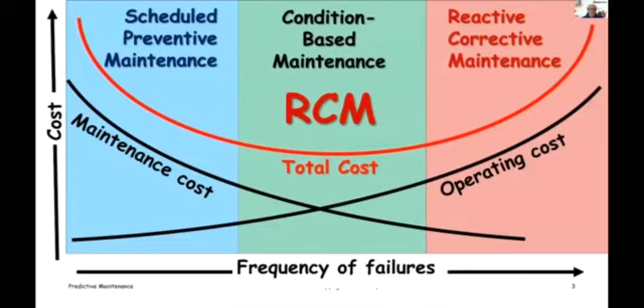So RCM is based on doing things on condition, and its purpose is to optimize cost and provide the optimal combination in terms of how the maintenance program is constructed.

The two primary tenets of reliability-centered maintenance - and it is a very deep subject, there are lots of big textbooks on this subject - but the two main tenets of reliability-centered maintenance that reduce preventive maintenance drastically are the following.

First of all, we want to think about the consequences of failures, and we don't want to be doing preventive maintenance to prevent failures that have acceptable consequences. I mean, for example, if you have two comm radios and one of them fails, that's an acceptable consequence. We have the redundancy to deal with it. It's not going to interfere with anything. We'll just fix the number two comm radio when it's convenient.

So for things with acceptable failures, we avoid doing preventive maintenance, and we accept a philosophy called run to failure. It used to be anathema - we couldn't allow anything in aircraft to fail, but now we're smarter than that. We know that there are a lot of things in aircraft that can be allowed to fail without compromising safety or the mission.

The second big principle in RCM is to do preventive maintenance strictly on condition wherever practicable, rather than on a fixed timetable. And the more we can do it on condition, the more optimized it should be.

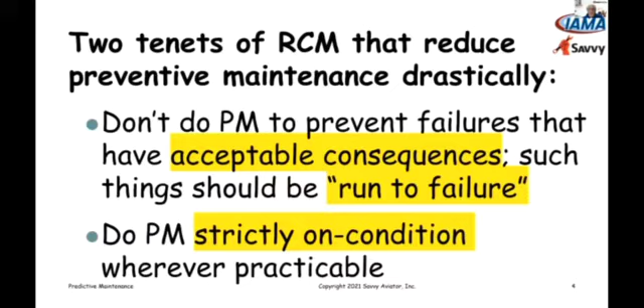We only want to do maintenance when there's a good reason to do it, not just because some number came up on the tach or the Hobbs meter. So condition-based maintenance requires determining condition. And how do we do that?

Well, there are a lot of ways to do that. Sometimes we do it through disassembly inspection, like magnetos, by direct visual inspection. And we have more powerful tools to do that now because we do a lot of work with bore scopes, where we can do direct visual inspection of things that we didn't used to be able to visualize that way.

We have lots of methods for determining condition based on indirect evidence, things like compression checks, oil analysis, oil filter inspection, that sort of thing. And increasingly now, we're able to determine condition based on sensor data. Condition determination based on sensor data is this new field called predictive analytics that I'm going to be talking about. So that's really what I'm going to be emphasizing in my talk to you today.

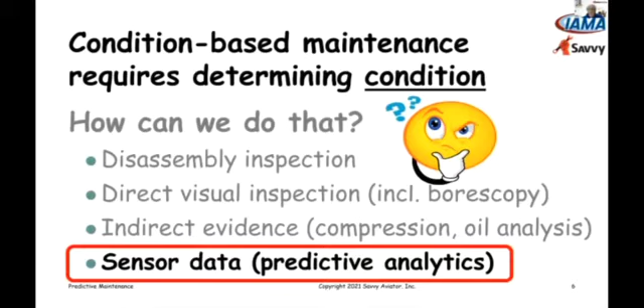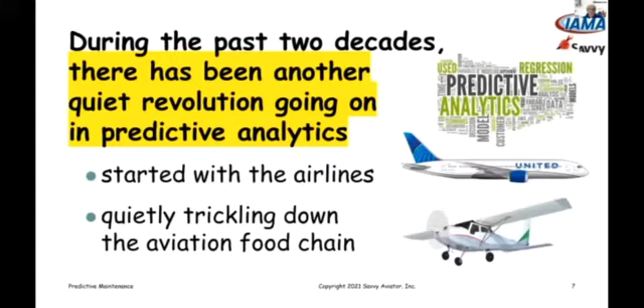Reliability-centered maintenance was sort of a quiet revolution in aviation maintenance philosophy that started in the late 60s and early 70s. During the past two decades, there's been another quiet revolution going on in this field of predictive analytics. And it's been pioneered by the airlines. It's quietly trickling down the aviation food chain to piston general aviation, although we're quite far behind the airlines in this area. But eventually it's going to have a profound effect on how general aviation maintenance is done, I believe.

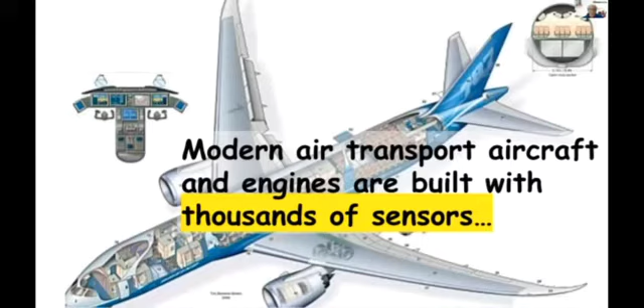If you look at a modern air transport aircraft like a 787 or something, those aircraft and their engines are built with thousands of sensors. Pretty much everything that can be measured in these airplanes have sensors that measure just every conceivable parameter that you can think of. Engine, electrical, hydraulic, air data, vibration sensors, flight control positions, landing gear positions, fluid levels, and all of the different things that have fluid in them, that sort of thing.

And all the data from these sensors is digitized by a data acquisition unit. And then it's either downlinked to the ground in real time while the airplane is flying, or it's captured in something called a quick access recorder and extracted from the airplane as soon as it lands.

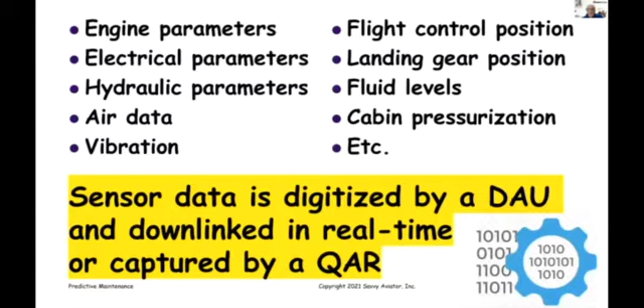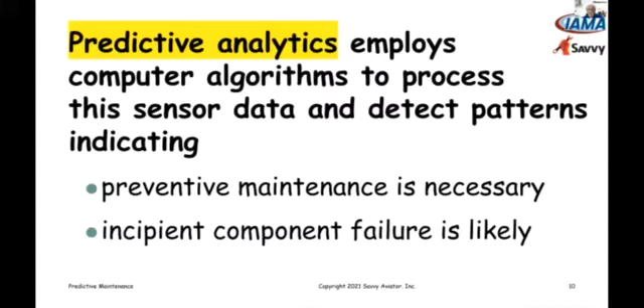And so predictive analytics employs computer algorithms to process all of this sensor data and try to detect patterns that indicate either that preventive maintenance is necessary or that some component is reaching the point where it's likely to fail incipiently. And so the whole purpose of all of this computer analysis of sensor data is to, again, try to do a better job of deciding when maintenance is necessary.

When we do it on a scheduled basis, we're typically doing it way too early. Scheduled maintenance is ultra conservative, and it winds up doing more maintenance than is necessary. Condition-based maintenance was a significant improvement, but predictive maintenance tries to go a step further and provide a more efficient way of determining when maintenance should be done.

We don't want things to deteriorate to the point that they fail, and that we have to do corrective maintenance, unless it's something that is okay to fail, so something that has acceptable consequences. But we don't want to do it too early either. So the whole idea of predictive maintenance is to try to catch it just in time.

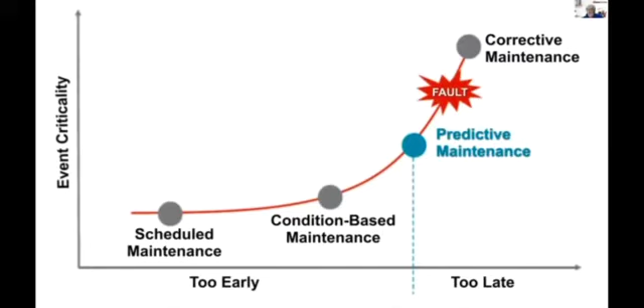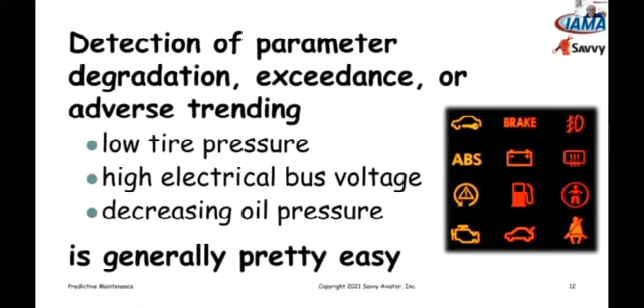Now, there are different things that we look at when we look at this sensor data. A fair amount of it are things that are just parameters where we're looking for degradation or exceedance of some limit or some trend that we don't like. Things like low tire pressure, high electrical bus voltage, decreasing oil pressure. And those are very, very easy to detect. Computers, it's a very simple exercise to analyze the data and look for things like that.

The more interesting things that we try to do with this data is prediction of rare events, things that don't happen very often. Contaminated fuel nozzle, a damaged compressor blade, a failing engine bearing. And prediction of rare events tends to be pretty difficult and require complex algorithms. I'll talk to you about a little work that we're doing in this area for piston GA engines in a little bit. But at any rate, those are the hard things to do, but they're the things with the biggest payoff.

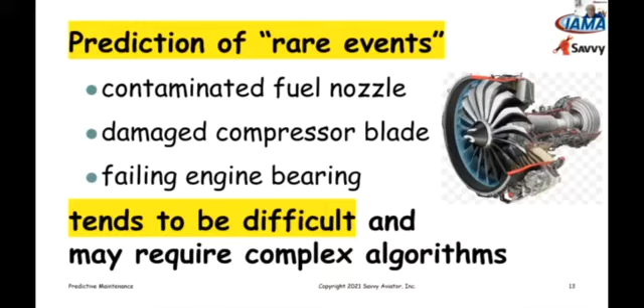Now, this whole field of predictive analytics was really pioneered by Boeing in 2004, when it launched a program called Airplane Health Management, AHM. The AHM monitors the health of an airplane in flight and relays that information real time to airline personnel on the ground. It actually relays it to a war room that Boeing maintains.

I had the opportunity to spend a half day visiting it and seeing all what's going on. It's very, very impressive. And then that information is distributed to the various airlines.

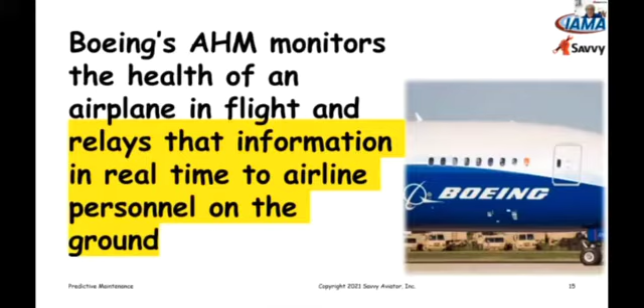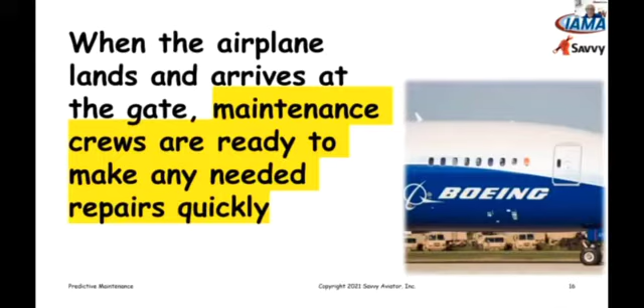So when an airplane lands and arrives at the gate, maintenance personnel already have been made aware of anything that they need to do. If the right hand nose tire is under pressure, or there's some low fluid level or something like that, they know it before the airplane even lands, and they're all ready to jump on it to minimize downtime and get the airplane turned around.

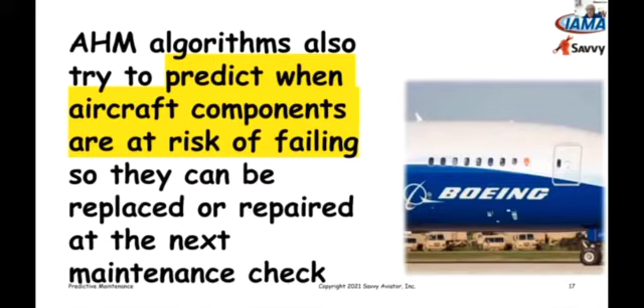So these algorithms, besides just looking for the simple things, also try to predict aircraft component failures, so that the components can be replaced or repaired at the next scheduled maintenance check. And nowadays, every airline that flies the more advanced Boeings, 777s, 787s, imagine the 737 MAX as well, uses this program.

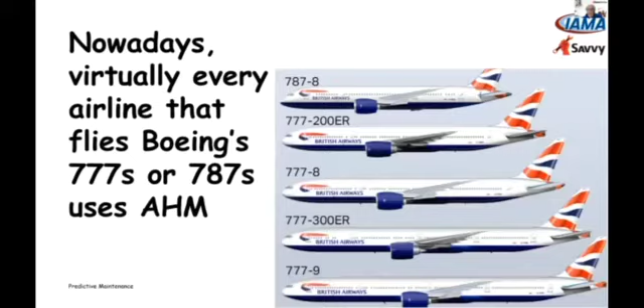Now, Boeing was the pioneer in this area, but they're certainly not alone. There are a lot of major players doing work in the predictive analytics area. Airbus entered into a partnership a couple of years ago with Delta Airlines as the pilot customer for its version of AHM, which they call Skywise Predictive Maintenance.

They were doing this on Delta's fleet of A320s and A330s. In the first few years of this program, Delta has claimed an absolutely remarkable success rate predicting failures before they happen. The statistic I found really remarkable: in 2010, before they started this, they had logged more than 5,600 maintenance-related flight cancellations due to squawks on the airplane that prevented it from being dispatched. In 2018, after being on the Skywise program, they logged only 55 maintenance-related flight cancellations. So it was a two order of magnitude improvement.

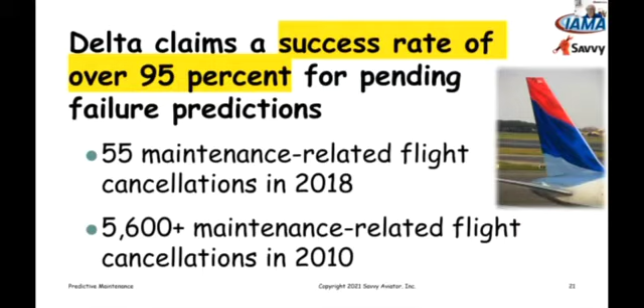That's probably a small enough sample that you can't read too much into it, but it is awfully impressive, and the potential for predictive analytics, I think, is really huge. So much for the airlines. What about Piston General Aviation?

Well, we've been doing quite a bit of work on this. As I said, we're way behind the airlines. This is a very fledgling area when it comes to Piston General Aviation. But Savvy Aviation was founded in 2008, and in 2013 we launched this program called Savvy Analysis, a program to provide analysis of digital engine monitor data.

Nowadays, something a little north of half the Piston GA fleet is equipped with some sort of recording digital engine monitor. Some of them are old and pretty crude; some are new and extremely fancy, with a large number of sensor inputs. It varies all over the place, but over half the fleet currently has some sort of recording monitor that captures data that can be downloaded from the aircraft and analyzed.

We created this program using a freemium model. We put up a very fancy software platform for analyzing the data and made it available to the user community for free. We have about 10,000 aircraft using this platform. We also offer a paid service called Savvy Analysis Pro, where users upload data and ask our team of professional analysts to analyze it for them. We also have a program called Pro Packs targeted to mechanics and shops, as opposed to aircraft owners.

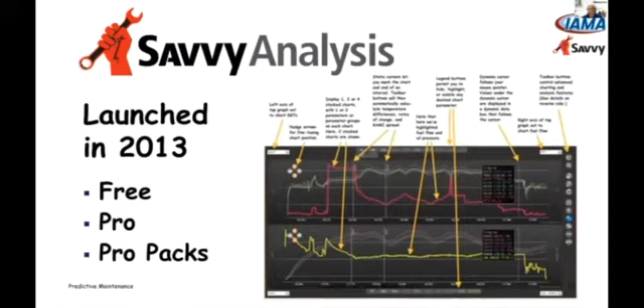This platform we created is web-based, so it can be used on literally any device with a standard web browser. We don't care if you have a PC, a Mac, or an iPad—it all works. We built the system to be omnilingual: it supports literally every make and model of digital engine monitor, both certificated and experimental ones.

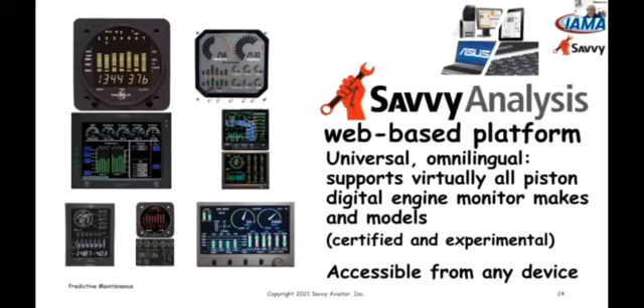Some of the most sophisticated monitors are the ones in experimental aircraft. Dynon has some phenomenal capabilities that you see in a lot of experimental aircraft. But pretty much any aircraft with any model of digital engine monitor that records data and can dump it, we can handle on our platform.

It has turned out to be an amazingly powerful tool for diagnosing all sorts of problems with piston aircraft—mechanical problems, operational problems. We see a lot of stupid pilot tricks that we can identify in the data and tell a pilot, hey, you really shouldn't be doing that, you should be doing it this way instead. We also see instrumentation problems, things like failing sensors and so on.

We always have to be able to distinguish between real problems and instrumentation problems. To some extent, we also do forensic analysis—we work with the NTSB doing analysis of data extracted from aircraft that have been involved in accidents. One of the neatest things about using engine monitor data for diagnostic purposes is that it's completely non-invasive. You don't have to take anything apart to inspect it—you just dump the digital data and look at it, and it's amazing the things we're able to determine just from the engine monitor data.

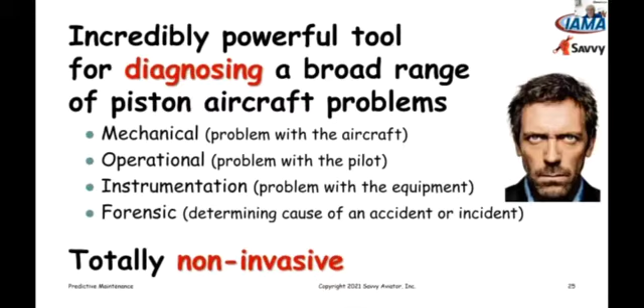The engine monitor data is probably the best thing I know of for assessing the condition of ignition systems. We can determine all sorts of problems that would be very hard to determine otherwise. Here's an example.

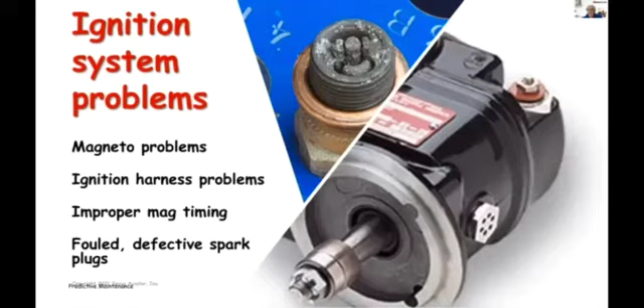This is one of the things we always ask our clients to do. We have a flight test profile that we ask them to fly, and one part of it is to do an in-flight mag check, done very slowly so we get quite a few data points captured by the digital engine monitor.

So here's a mag check that was done in flight. We like to have it done at cruise power with the leanest possible mixture, preferably lean of peak, because the leaner the mixture and the higher the power, the more difficult it is for the spark plug to ignite the fuel-air mixture.

So to test the condition of the ignition system, we really want to put it under maximum stress, worst case conditions. A higher power, very lean mixture is the most demanding situation for an ignition system. If it looks good under those conditions, it's going to be in really good shape.

Whereas the mag check we do during run-up on the ground at pre-flight will only detect the grossest ignition system malfunctions. But if we do an in-flight mag check at relatively high power and very lean mixture, that's a really, really good test.

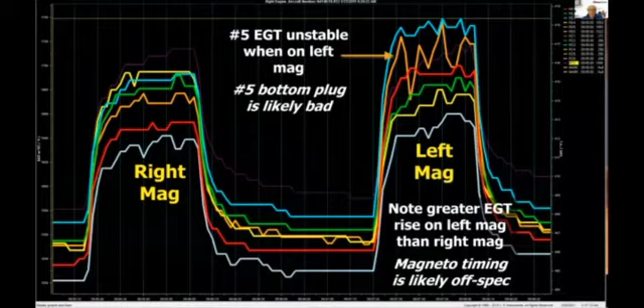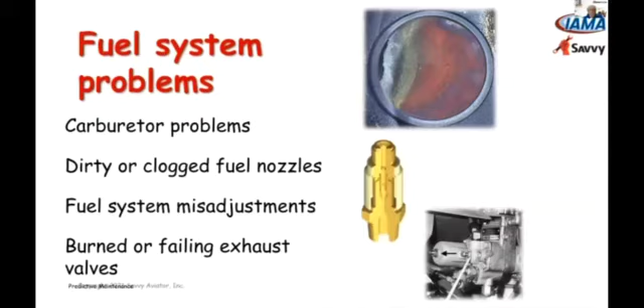The other area that this is extremely useful for is dealing with all sorts of fuel system problems.

The other part of the flight test profile we ask owners to fly is what's called a GAMI lean test, where they do multiple very slow sweeps of the mixture control from a rich mixture to an extremely lean mixture and back again. And we can watch what the EGTs do as the fuel flow varies.

The key thing we do is compute what's called a GAMI spread, which is the fuel flow difference between when the leanest cylinder peaks and when the richest cylinder peaks. In a perfect world, they would all peak at the same time. In the real world, they never do. But that GAMI spread is a good measure of how poor or good the mixture distribution is.

So the first thing we'll suggest is pulling the number 3 injector nozzle and cleaning it. And if that doesn't resolve the problem, then probably a one-size-larger injector ought to be installed to try to get the mixture distribution to be the same.

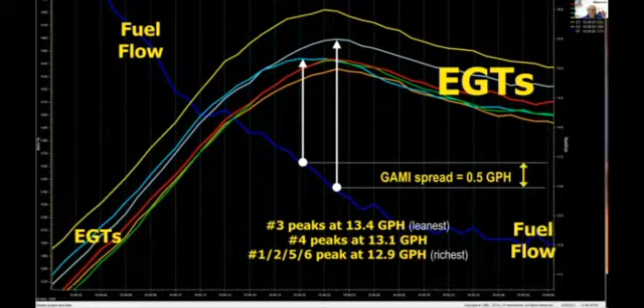Abnormal combustion events.

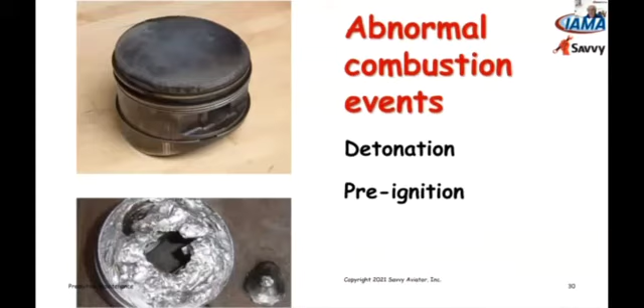This is something more in the forensic area, but we have captured lots of data when very interesting things happen in the combustion chamber. This is an example of a pre-ignition event, a very classic pre-ignition event.

The pilot applies takeoff power. CHTs and EGTs start coming up normally. Then all of a sudden, cylinder number 3 has a thermal runaway. In a period of less than 2 minutes, the CHT on the number 3 cylinder increases from 374 Fahrenheit to 653 Fahrenheit, less than 2 minutes. That's a rate of 2.6 degrees per second, which is extremely rapid. Our platform gives us the ability to just tag 2 points, and it'll automatically calculate the rise rate.

Any increase in cylinder head temperature over about 1 degree per second is normally associated with a pre-ignition event. It's the only thing violent enough to heat up that big head casting that quickly. But we also see lots of detonation events which play out more slowly, but also result in a rise of cylinder head temperature way above what it ought to be. So we've gotten pretty good at recognizing this kind of stuff.

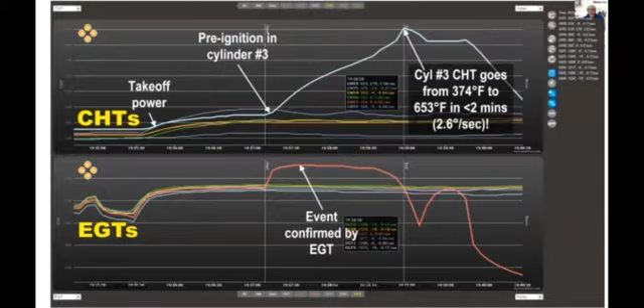Most of these engine monitors let us see at least bus voltage, sometimes various currents, and we can do a pretty good job of analyzing whether the charging system is working properly. We do a lot of Cirruses. They have a dual electrical system that's fairly complicated, dual bus, dual alternator, and dual battery. We're able to see a lot of stuff in the electrical system on that airplane and pretty much diagnose what's wrong.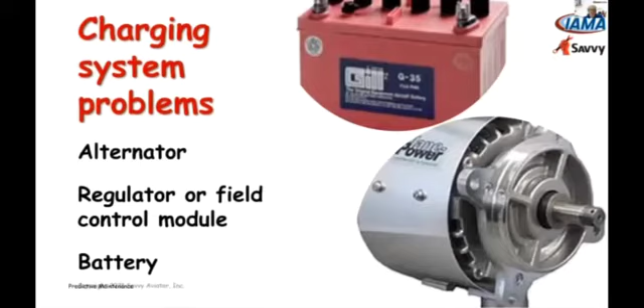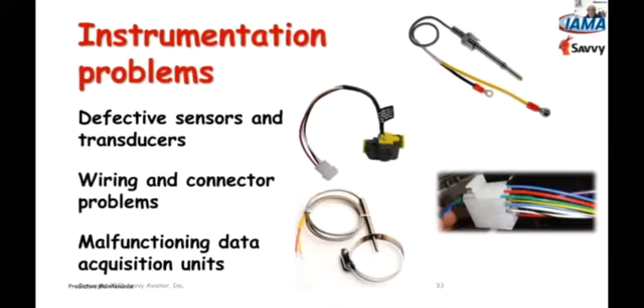Again, sometimes we have to deal with instrumentation problems, defective probes, bad connectors, that sort of thing, and we need to be able to distinguish between something caused by a bad probe and something that's a real problem. It's usually not too hard to do that.

We see a lot of operational issues with pilots using poor power plant management techniques and not keeping their temperatures well controlled and so on. We can see all that in the engine monitor data and give them some tips about what they ought to be doing.

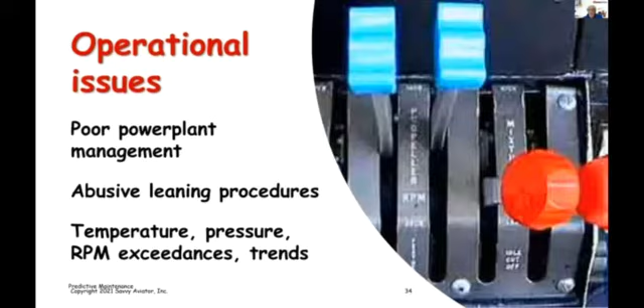Since we first started doing this in 2013, we've now accumulated in our database more than 3,500,000 flights flown by piston GA aircraft. And that's a lot of data. There's some interesting things you can do when you have a lot of data like that, and so we've been working on that.

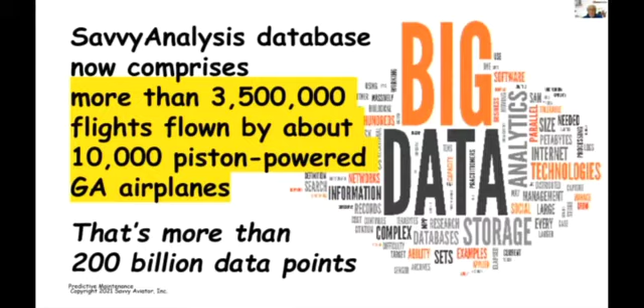In 2015, we launched a program called the report card program. The concept of the report card program was to give the aircraft owner a report on how various critical sensor parameters for their aircraft compare with all of the other aircraft of the same type that we monitor in our system. We have pretty much every kind of airplane flying in that system, but we have a lot of Cirruses, a lot of Van's RVs, lots of twin Cessnas, Cessna 210s, and Bonanzas. So the idea is if you're flying a Bonanza, the report card will let you see how you're doing compared to all the other Bonanzas that we follow.

And that group of aircraft that we compare you against is what's called a cohort. If you think about oil analysis reports, some of the labs, like the Blackstone lab that we tend to use, provide in your oil reports not just the data from your particular engine, but also a mean of the data for all of the other engines of the same type that they follow. So you have something to compare your data with, and that's the concept here with a report card.

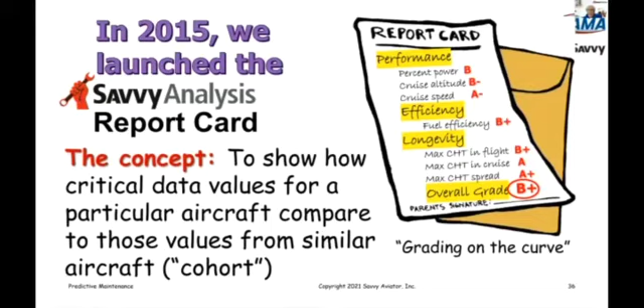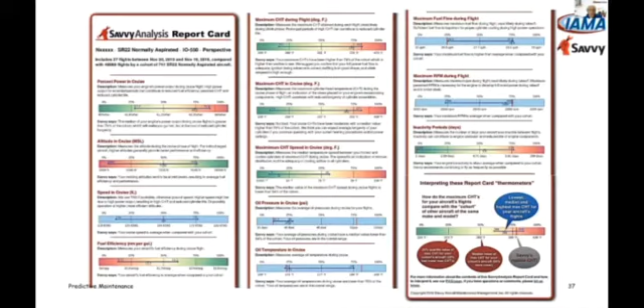So, for example, here's kind of what a report card looks like, and I'll take just a quick look at some of the stuff on here. This particular report card was for a Cirrus SR-22, and it was comparing the result of 27 flights by this particular aircraft against 46,886 flights of 741 other Cirrus SR-22s that we follow.

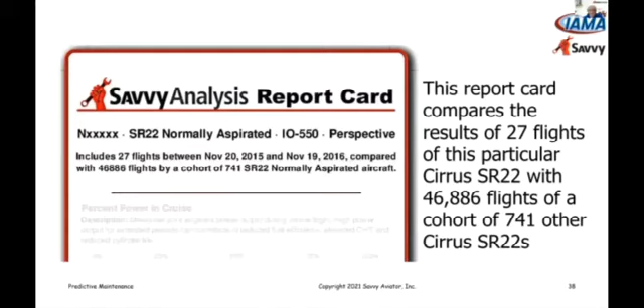So for each parameter, there's a block on the report card that looks like this, that has a thermometer on it, and then some verbiage. The color bar on the thermometer depicts the percentiles of that parameter that we've seen in the cohort, and the blue line that runs down the middle of the thermometer is the actual values for the subject aircraft that we're reporting on, where there's a dot that represents the median, and the two extremes of that line are the minimum and maximum values we saw for that parameter.

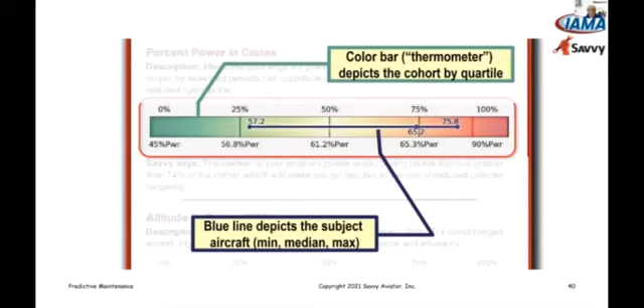And so each block contains one of these thermometers, and then some textual information where we interpret what it means and any corrective action that we think ought to be taken.

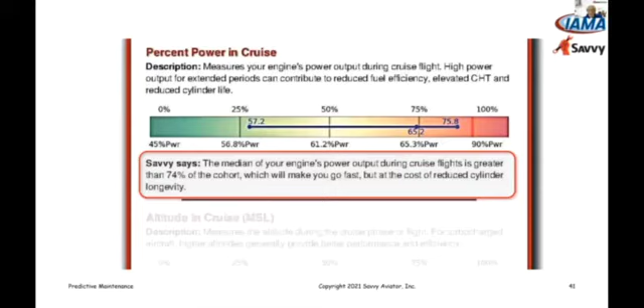All these reports, the report card and trend analysis and so on, we send out periodically to our clients, but they can also go online anytime and ask for them on demand. So if they're looking for a particular date range, they just go on a website and pull the report card or trend analysis report right on the spot.

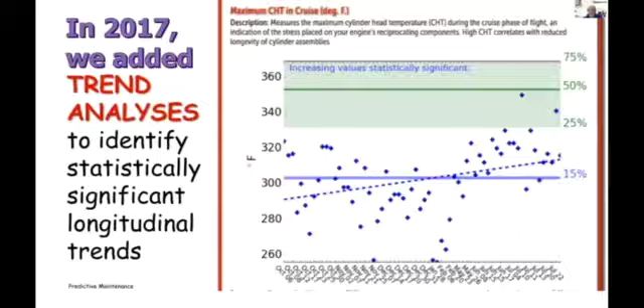So that brings us to the area of predictive analytics. We stuck our little toe in the water in this area in 2014 when we introduced something called FEVA, Failing Exhaust Valve Analytics. What we were trying to do is come up with a computer algorithm that would scan uploaded engine monitor data, looking for signs that an exhaust valve was starting to fail.

Exhaust valve failure is the primary catastrophic failure mode of piston engine cylinders that will cause a cylinder to just pack up and quit. If you're flying a 6-cylinder aircraft and it swallows an exhaust valve, the engine gets really rough. And if you're flying a 4-cylinder aircraft and you lose a cylinder, you're probably going to wind up making a precautionary landing off airport, because 4-cylinder engines don't run nearly as well on 3 cylinders as 6-cylinder engines do on 5 cylinders. But in any case, we had noticed over the years that when exhaust valves start to fail, they frequently exhibit an unusual oscillation of exhaust gas temperature.

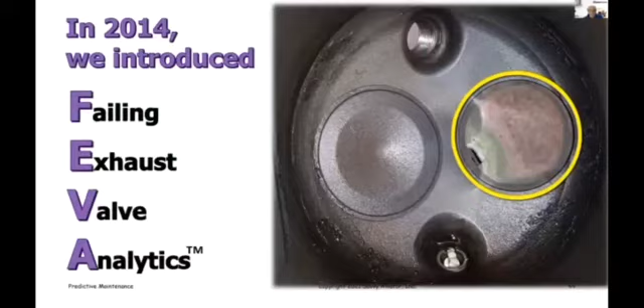And the oscillation is unusual in that it is very slow and rhythmic. Most of the time when we see this and drill down on it, it turns out that the EGT is oscillating at something like 1 cycle per minute, which is very slow. It's such a slow oscillation that you never notice it in the cockpit, but we clearly see it in the data. And why would it be so slow?

Well, it turns out that the exhaust valves in these engines have a rotator cap on them that causes the valve to rotate a tiny fraction of a degree every time the valve opens and closes. It does this both to equalize the temperature distribution on the valve, and also to try to keep the deposits that accumulate on the valve seat clean by rotating the valve. In any case, it turns out that when an aircraft engine is running at a typical cruise RPM, that valve is actually rotating at something like 1 revolution per minute.

So if the valve is leaking gas out of a hot spot someplace, and the rotator is still working, then that hot spot will wind up rotating around about once per minute, from the hottest portion of the combustion chamber to the coolest portion, and so on. And so we'll see this very subtle, very slow, very rhythmic EGT oscillation.

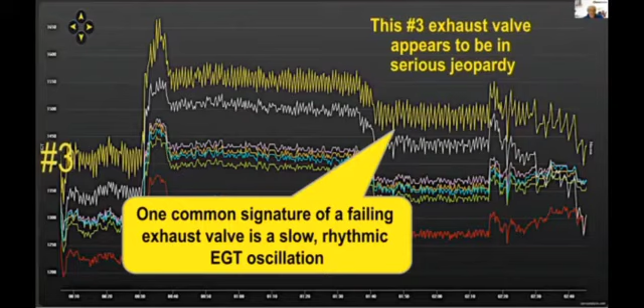So we came up with an algorithm to detect that. We back tested it on a whole lot of data and kept tuning it until we had the minimum number of false positives and so on. And came up with an algorithm that had some moderate success at predicting incipient exhaust valve failures. Whenever we would see this in the data, we would notify the owner and say, you need to stick a bore scope in that cylinder, take a look at the exhaust valve ASAP, and see if it's got this distinctive asymmetric heat signature on it that would be indicative of the fact that the valve is starting to fail.

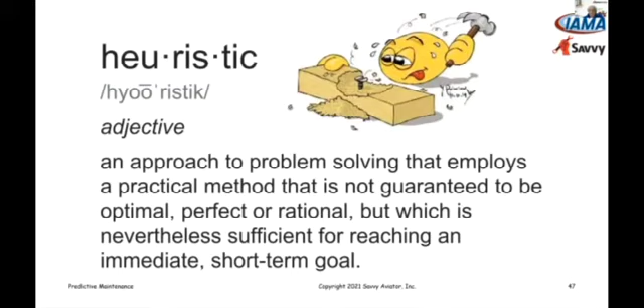Now, this was a heuristic algorithm, to be honest with you, we weren't completely thrilled with its accuracy. So we thought about, wondered whether we could do something better.

And so we started getting interested in using an artificial intelligence technique called machine learning, where instead of us as humans saying, well, this is what we think a failing exhaust valve looks like, and then writing a computer algorithm to detect that pattern that agreed with the human analyst, we let the computer figure out what a failing exhaust valve looks like by giving it lots and lots and lots of data and telling it which of those flights turned out to have a failed exhaust valve. And computers turn out to be very, very good at, in fact, much better than humans at recognizing these patterns.

So we created this new program called Savvy AI, where we would be using artificial intelligence techniques, and in particular machine learning techniques, in order to try to do a better job of predicting failures. And we wound up coming up with a whole new version of FEVA that we call FEVA 2.0, that instead of using this heuristic algorithm looking at exhaust, at EGT oscillations, used machine learning techniques.

And we fed it data from lots and lots of flights, and we told it which of those flights were known to have failing exhaust valves based on a borescope inspection or something. We'd recorded a lot of that information on our maintenance management tickets. So we searched through the maintenance management tickets looking for incidents where there were exhaust valve problems and cylinders had to be pulled because of bad exhaust valves and so on.

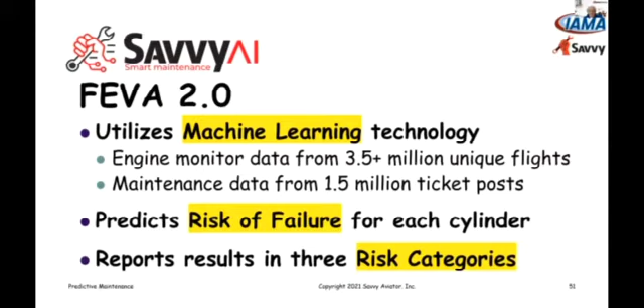We also, as part of what we did with FEVA 2.0, instead of it being a kind of a go no go thing that rang a bell when it thought it saw something that was a problem, the FEVA 2.0 algorithm actually tries to compute a risk probability of failure, and comes up with a number, a score for each cylinder in the engine. The higher the score, the more likely it is, we think, that the exhaust valve is in jeopardy.

So if you compare FEVA 1.0, it used a single variable, that is EGT, and in fact, oscillation of EGT that met certain criteria as a predictor of exhaust valve failures. With FEVA 2.0, we have 34 predictors that go into the algorithm, all sorts of stuff. Humans are just not capable of coming up with algorithms with 34 independent variables. Our brains don't work that way, but computers do a very good job of doing that.

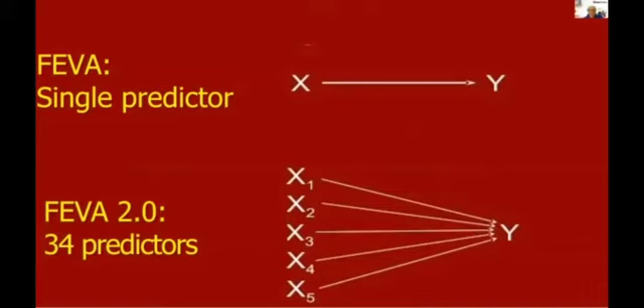At any rate, we let the machine figure out how to predict this thing instead of us trying to teach it how to predict it. So we feed all this data into an algorithm. We give it training cases where we know that the valve was good or we know the valve was bad, and it just goes through this mathematical black box and comes out with a score, a risk score.

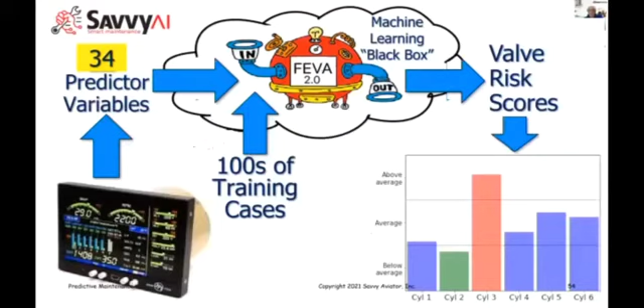And it's kind of magic. And when people ask us, well, what's the reason that the algorithm said that my number 3 cylinder was at high risk of failure? We can't answer that question because we don't know why it came up with that. It's a very complicated mathematical function. That's one of the frustrating things about machine learning is it does a really good job, but we can't explain exactly why. It's too complicated.

And the other neat thing about the machine learning approach is that the algorithm keeps getting better and better because we keep running more training cases through it and keep teaching it. Every day, Savvy gets 850 new flights added to our database, about 365 new ticket posts, and from time to time we create a new, bigger training set, run it through the algorithm, and kind of retune it. And so it's just going to keep getting better and better over time.

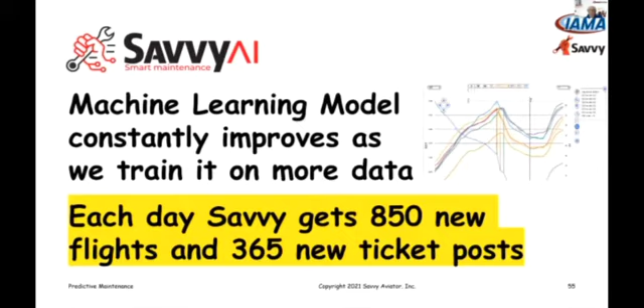This is what the FEVA 2.0 report originally looked like. It was a bar graph. It had a bar for each cylinder in the engine. The higher the bar, the greater we felt the risk was. We quantified the risk into 3 categories: below average, average, and above average risk. A cylinder that scored below average risk was about half as likely to have an exhaust valve failure as the average cylinder, and those that were classified as above average risk were about four times as likely. We colored the bars green if it was below average, blue if it was average, and red if it was above average. And we titled the report FEVA 2.0 Exhaust Valve Failure Risk.

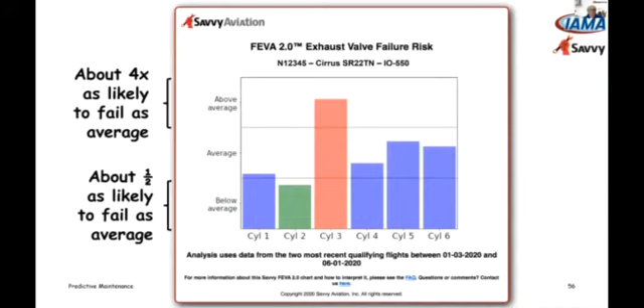So after working on this for a long time, we finally decided it was ready for prime time. We started sending these reports out to our clients.

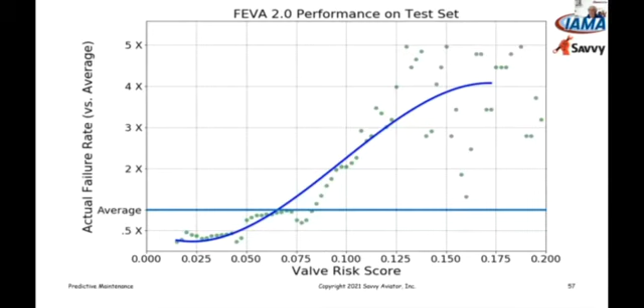And guess what happened? They freaked out. First of all, they saw this thing called failure risk, which really got their attention. And if they ever had a red bar that said above average failure risk, it was like, oh my God, I'm going to die. It was just this gigantic overreaction to it.

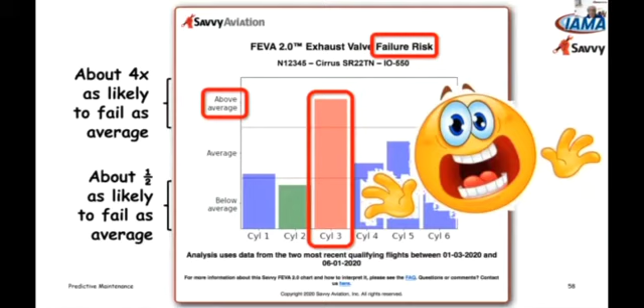And we recognized that it's not only important to do the math right, but it's also important to do the psychology right. So we wound up revamping the report in a number of ways to try to elicit the appropriate reaction from owners, which is maybe you ought to stick a borescope in there, but not a panicky reaction, which is what we were getting originally. So the reports that we're putting out now look more like this.

First of all, we stopped calling it failure risk. We just call it exhaust valve condition - a nice neutral term. We don't color the bars red, blue, and green. We sort of use a spectrum thing, and even the highest risk isn't red, it's orange, because we just didn't want to panic people.

And on the left-hand side, instead of calling it above average or below average, we put a probability of failure percentage, so that even the highest bar, you can see that the probability of failure is only about 8% or something like that. It's not anything to just freak out about. And we'll continue to fine tune the psychology of this in order to get the appropriate reaction from aircraft owners.

It was an interesting challenge. We thought this was a highly technical thing, and then when we deployed it, we discovered that there were some very non-technical aspects to it that we had to work on. But you get the idea - this thing gives the same information as the last one, it just does it in a different way that hopefully comes across a little less panicky.

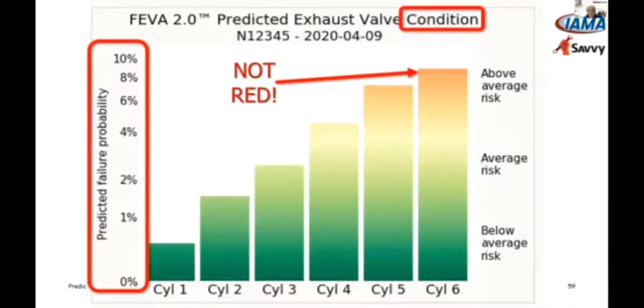Another algorithm we're working on right now, which we call SIVA, is looking to identify sticky exhaust valves. This is a big problem, particularly with Lycoming engines, where we're seeing a lot of stuck valves that if they're caught early, it's no big deal. You don't even have to pull the cylinder - you just drop the valve in the cylinder and ream out the guide, put the valve back in, everything's good. But if it's not caught in time, it can result in quite bad things.

It can result in bent push rods. It can result in valve strikes. We even had cases where a valve strike caused the head of an exhaust valve to pop off and shatter a piston, causing a catastrophic engine failure.

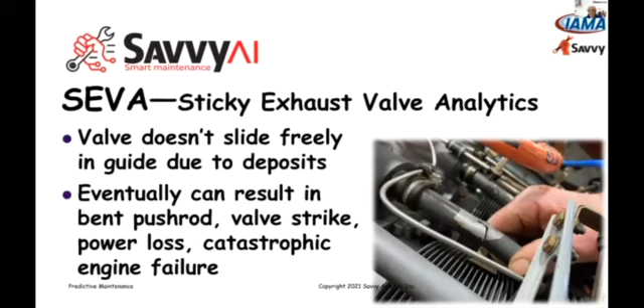So we were working on an algorithm to identify sticky exhaust valves. We're starting off with a heuristic approach, and we may ultimately apply machine learning to this one as well. But it's a rare situation - it's a little difficult when you don't have an awful lot of known failure cases to run through the algorithm.

The classic way that we detect this stuff without a computer is what's generally called morning sickness, where when an engine gets a sticking exhaust valve, the first sign is that when you first start the engine, it runs real rough for 30 seconds, a minute, two minutes, because one of the cylinders doesn't start combusting until the engine warms up a little bit. A savvy owner who understands this stuff will recognize that symptom and will do something about it.

But most owners aren't really sensitive to this, and they kind of ignore it and say, it always does that. It'll clear up and it'll run smooth by the time I get to the run-up area, and it does. And so they kind of ignore the early warning sign.

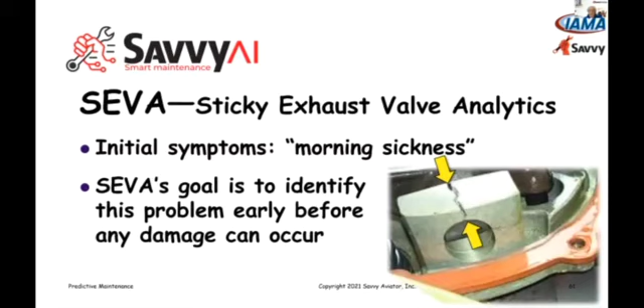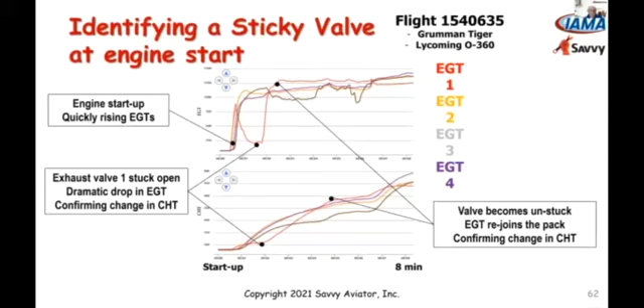So we wanted to see if we could come up with something that would strengthen the early warning. So we've been working on a heuristic algorithm that identifies, looks for basically EGT dropouts, or EGTs that fail to come up shortly after engine start while the cylinders are still warming up. And we've done a bunch of analysis on this to try to get the algorithm as good as we can get it. We're still actually tweaking it.

We have not rolled it out yet, but that's probably our second predictive analytics algorithm that we're going to be putting into our platform, hopefully within the coming month or two.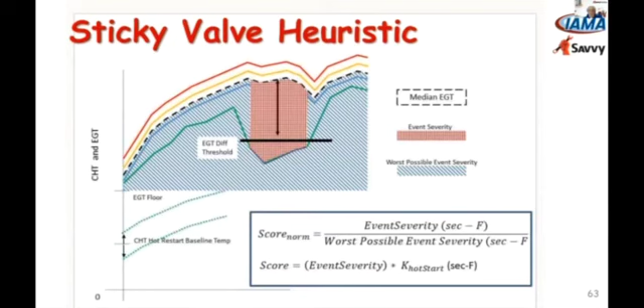Once we have developed these clusters, we can then analyze data looking for data points that fall outside of the cluster, and look for how far outside it is. If we get a significant number of data points that are outside of what we've established as normal clustering, then we tag that flight as interesting and flag it for one of our human analysts to take a look at.

The clustering algorithm doesn't really tell us what it is that's wrong. It's not like FEVA, where it's looking for a particular kind of failure. It's looking for something that's out of the ordinary and flagging it so our professional analysts can take a look at the data.

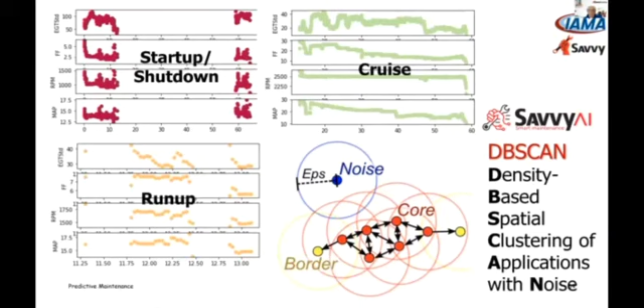So what's next on the agenda? One of the things we want to do is create algorithms for detecting detonation and pre-ignition events. Particularly detonation events - sometimes the pilot isn't even aware that they happen, but there's the potential for damage. If one of these events occurs, we definitely want to stick a borescope in and see if there was any significant damage that needs to be dealt with. So we want to identify these events in the data and flag any flight where we see what looks like a detonation signature.

Pre-ignition events, the pilot's always aware of, because usually a pre-ignition event ends with something in the cylinder melting or coming apart. But detonation is a little more subtle, and it frequently goes undetected by the pilot. So we want to make sure those events are detected so that somebody can take a look inside the cylinder and see if it did any damage.

As I mentioned, we're working on this clustering approach for detection of nonspecific out-of-cluster events that warrant human analyst attention. We're somewhat limited by how many sensors there are in the aircraft, how much data we have to look at. Older legacy aircraft tend to have relatively few sensors, maybe just EGTs and CHTs, or a few more things. Newer aircraft have a lot more sensors - we can look at air data, GPS position, roll, pitch, yaw, all sorts of things. Over time, the trend is clear that we're going to have more and more sensors in our aircraft and more data to look at.

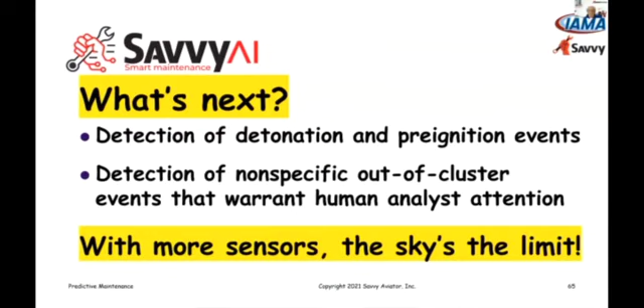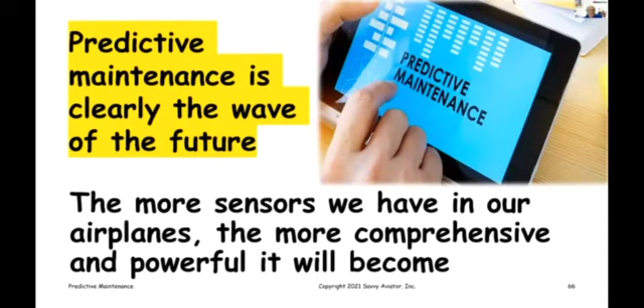The more data we have to look at, the more exciting things we'll be able to do with it. I think predictive maintenance is clearly the wave of the future. As I said, the more sensors we have, the more we can do. Over time, it will increasingly be our aircraft rather than our mechanics that tell us what maintenance needs to be done, which in my view is the way things ought to be.